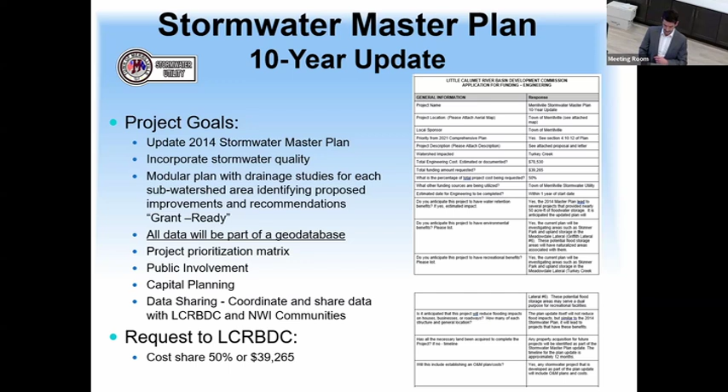Our request, the approximate cost is roughly $78,000, so the request as an engineering request is for 50% of that, which is $39,265. Just real briefly, the previous master plan came out of a lot of what we all remember from 2008.

We would be using similar models that we had before, again, looking at detailed hydrologic and hydraulic models, very similar to what you've been doing for your studies for the commission here. Looking at land use within each subwatershed, looking at things such as the revenue contribution from their stormwater utility, the wards. There's a stormwater quality component that we looked at in a lot of detail, looking at the hotspots from EPA and other websites and incorporating that.

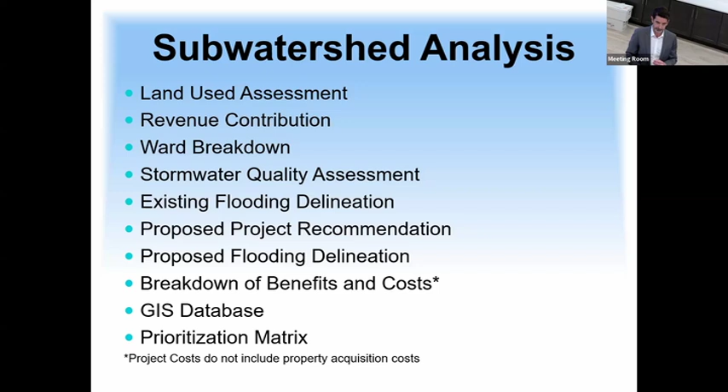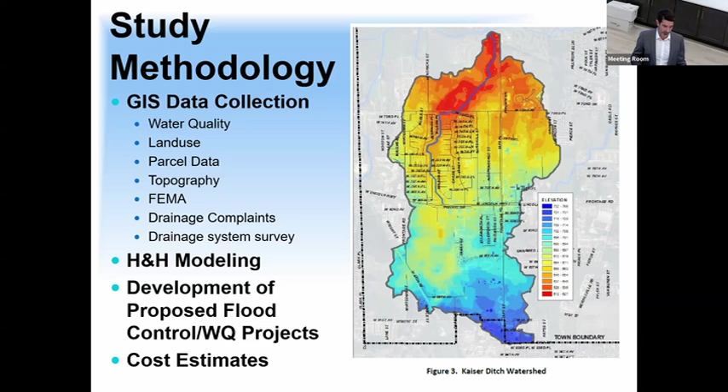And so we're going to be updating these hydrologic and hydraulic models and this GIS database with this new information and new methodology. Again, coming back to developing new projects and coming up with cost estimates for those projects.

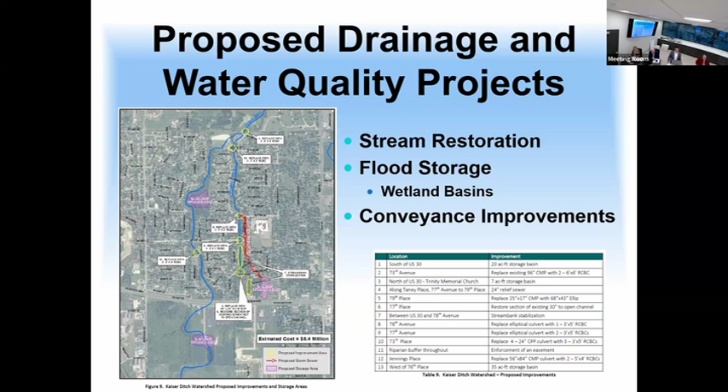That's really the goal of the previous watershed plan. I'll talk briefly about a couple of projects, but the previous watershed plan was really a launching pad for the town to implement several projects that have been very beneficial.

And that's really the goal of this plan, to come out of it with projects like stream restoration, flood storage, and conveyance improvements, all things improving quality of life in the town. I'll scroll through a couple slides here. These are 8 sample projects that originated from the previous plan. It's important to note these consist of flood storage, which is usually the primary component, storm sewers, stream bank stabilization, and culverts providing flood protection and watershed benefit.

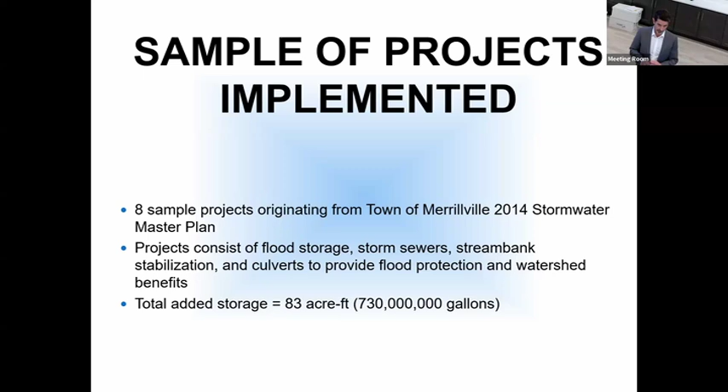The total storage added in the town since that study is 83 acre feet, or 730 million gallons of floodwater storage, added since 2014 based on the results of that 2014 master plan. That's why we feel it's so important to update it, so we can find more projects that provide this type of storage in the watershed.

One of the first was the Taft Street Drainage Improvement Project. That was $2 million, roughly 20 acre feet of storage, by coordination with INDOT.

Another project I was involved with is the Meadowdale Lateral Flood Storage Project. As part of this, in coordination with the commission, we analyzed the full upstream watershed and provided additional work that could be done. A tremendous amount of flood storage, 45 acre feet, was all provided in wetland habitat out here, something identified in the 2014 Stormwater Master Plan.

Grand Boulevard Drainage Improvement Project. This was more of a stream bank stabilization project that came out of the Stormwater Master Plan.

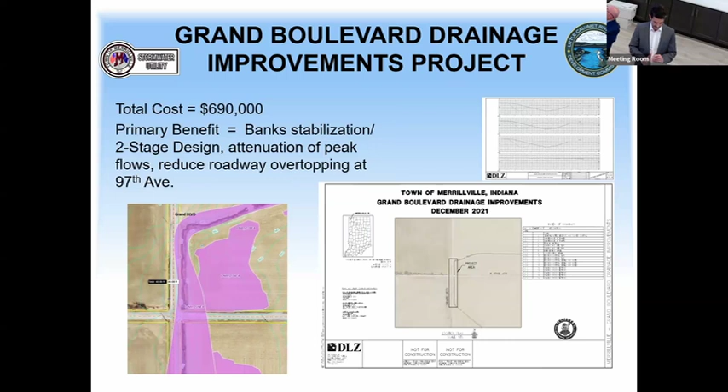Connecticut and 69th, this was to help protect a school in a neighborhood and to eliminate a lift station. It involved primarily storm sewers.

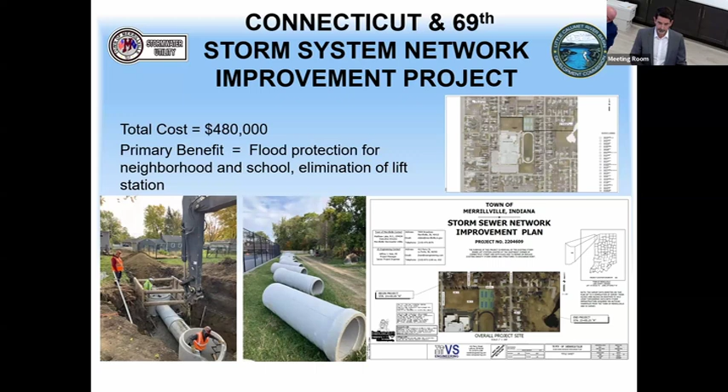Kaiser Ditch East Tributary Flood Control Project, again, came directly out of the Stormwater Master Plan and primarily included reconstruction of culverts that we see here in that nice picture.

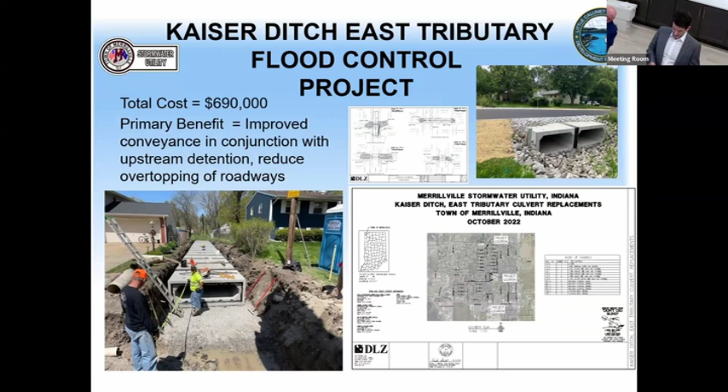Hickory Ridge is one that currently has completed design, has been bid out, and is starting construction. Hickory Ridge subdivision was hit really hard during the 2008 flood event, the main level completely inundated with flooding. This project provides additional flood storage as well as pump station and drainage improvements to protect the condo complex.

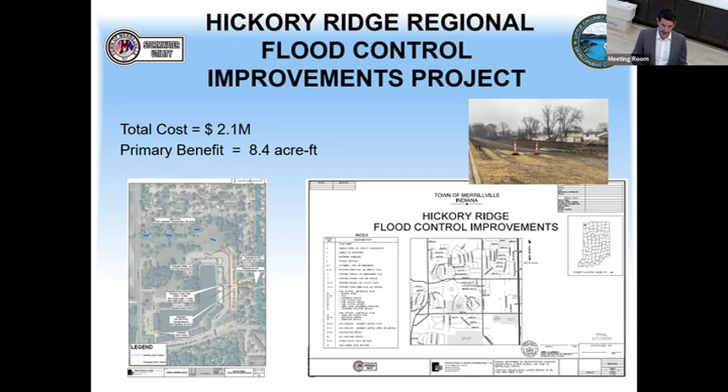And finally, one here on the far west side of town, which involved primarily storm sewers and drain tile work.

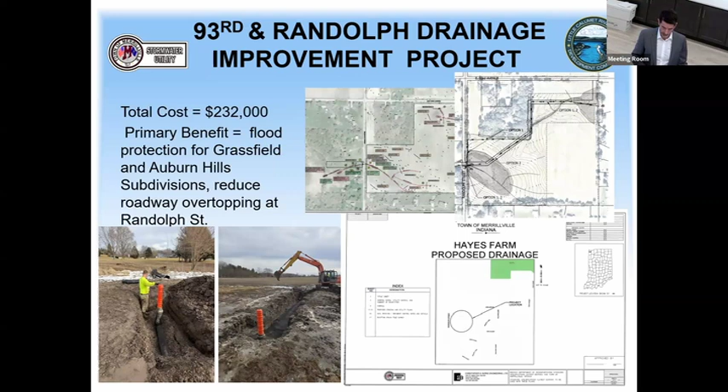So with that, I know Matt, if he were here, would give a special thanks to the commission for all your support in the past, and looks forward to teaming with you in the future for great drainage flood control projects. Thank you.

With that, I'll answer any questions. Thank you, Darren, appreciate it. Anybody got questions? Thank you for allowing me to speak. Start down here on the left. Had one question, go ahead.

Go ahead, Robert. For the roughly $39,000 engineering study, what's the duration of that? How long before we'd see the deliverable, one year, you said? It would be approximately one year.

Thomas, you good? Did I see 50 acre feet of storage? Where did I see that at? On the first or second slide somewhere, maybe?

Yes, so this is the Meadowdale Lateral Flood Storage Project, in the town just south of 55th, I believe. It's actually three basins, two directly next to each other and one off to the side, on the drainage way called Meadowdale Lateral. And yes, that was 45 acre feet of flood storage.

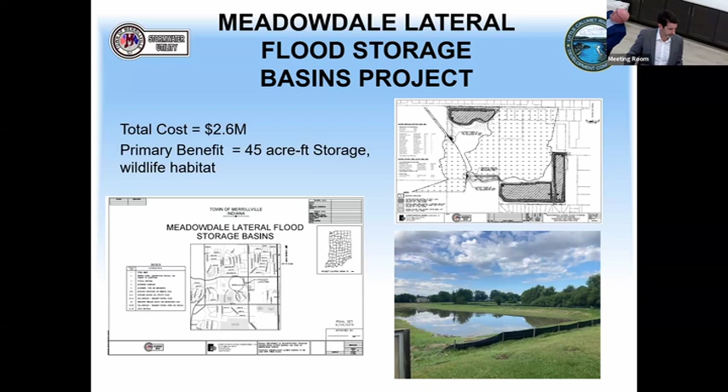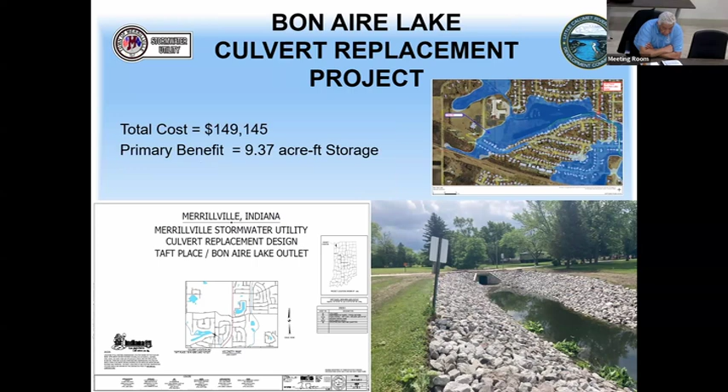Do you have, this is sort of an arbitrary question, maybe this is a Matt Lake question, any type of sense of what the potential acre feet storage opportunity might exist further up north than that?

Yes, we did study that, and there were areas, some vacant land, I believe at one point owned by maybe the school district, further north of the town's limits. We looked at a couple different alternatives for providing quite a bit of flood storage, many times this amount, up there. I believe that's one of the things Matt would like to do as part of this update, to really dive into that and determine exactly how much benefit there would be and ways to team with other stakeholders to try to make that happen.

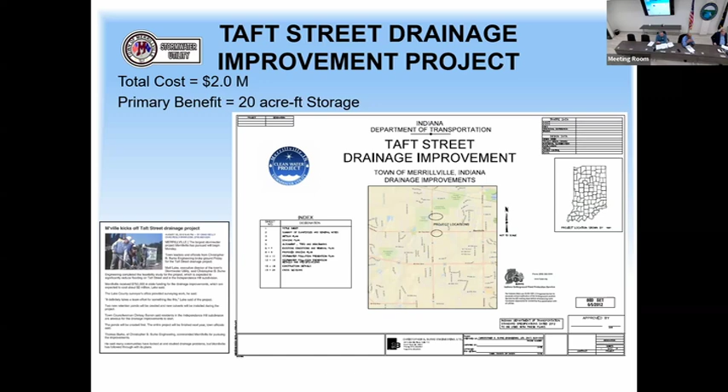Seems like they addressed a lot north with Hickory and Meadowdale, and if there's opportunity south, hopefully this study could contribute to that. Yeah, I think Matt intends to fully look at it, I'll go to the map here.

Meadowdale Lateral is up at the northern part of the town boundary, but Matt's intention is to not only look there and a little bit north of the town boundary, but also at these other areas, Kaiser Ditch, where we saw projects. He wants to look at Chapel Manor, there's a couple projects he'd like to do there. At Broadfield, there's been some work with development that he wants to make sure gets incorporated into the master plan.

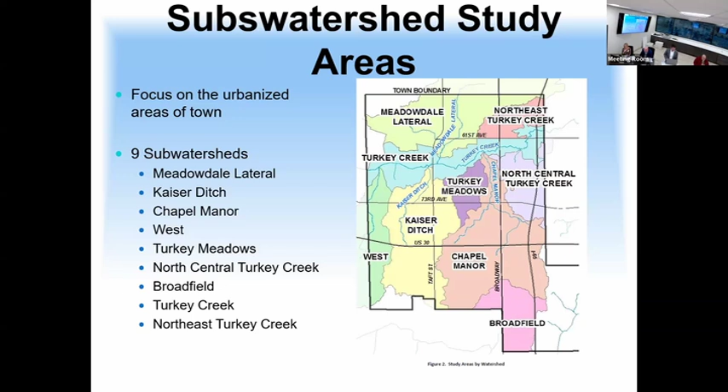Okay, great, thanks, dear. Ron? Oh good, excellent, thank you, Darren. Thank you for having me.